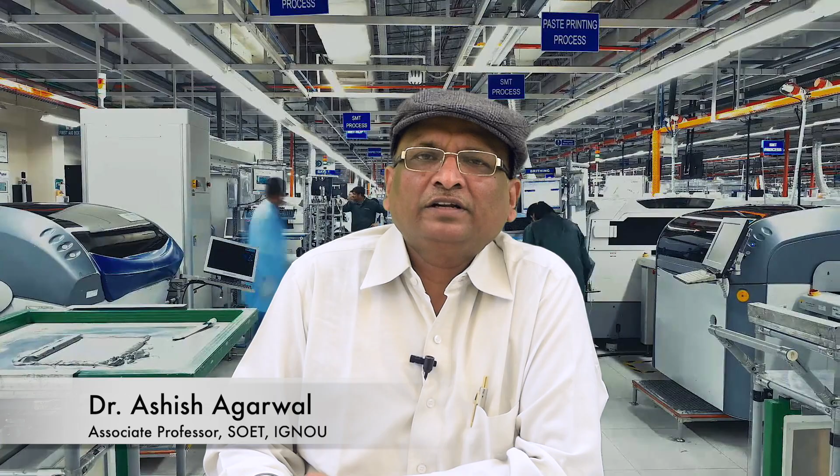When we discuss capacity planning, it is very important that we should know the sequence of activities. First, through forecasting, we have customer demand. Then, through aggregate planning, we have production planning. And then finally, with MRP and capacity planning, we decide what capacity is required at our end. The management must plan the capacity of its process after deciding what products or services should be offered and how they should be made.

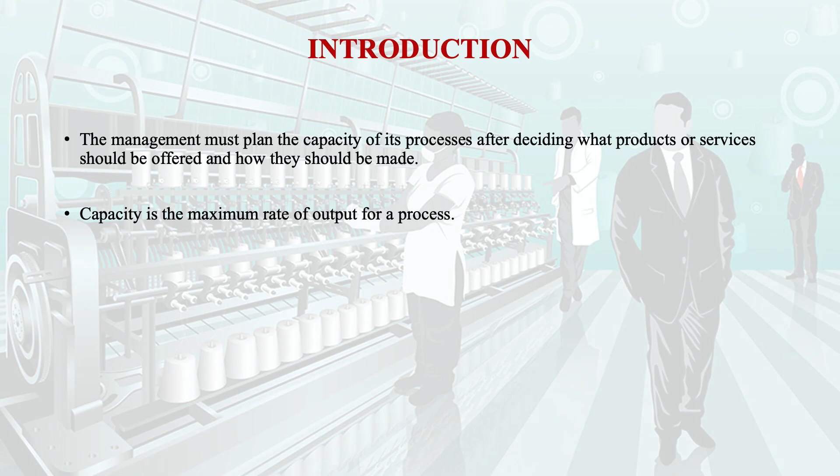Capacity means the maximum rate of output for a process. Under capacity planning, the operation manager should have the decision-making capacity to cope up with the present and future demand. Otherwise, the organization will miss the chance of growth and profit.

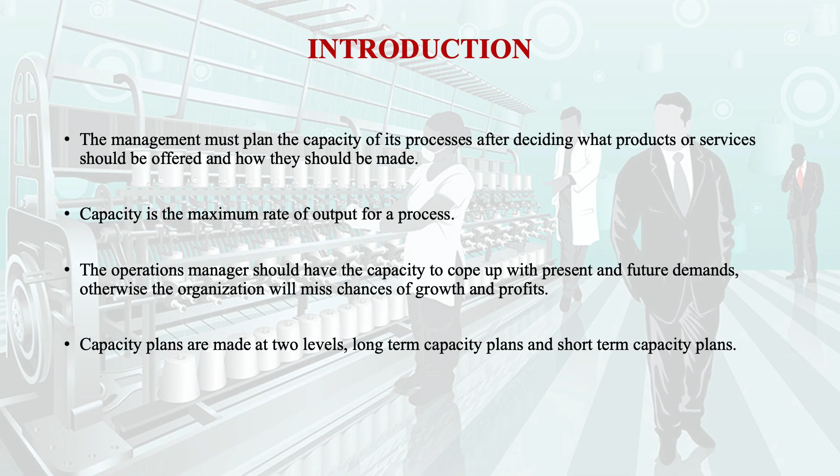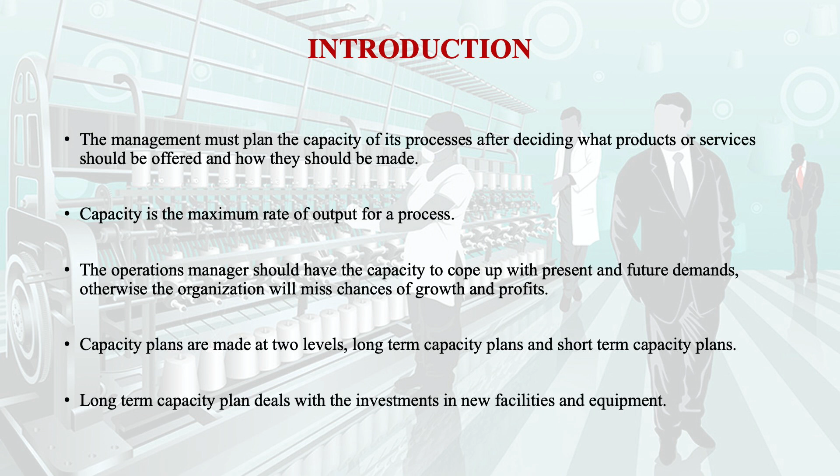Under capacity planning, there are basically two levels: first is the long-term capacity plan, and second is the short-term capacity plan. Under the long-term capacity plan, we deal with investment in new facilities, new equipment, and these plans extend at least up to 2 years in the future.

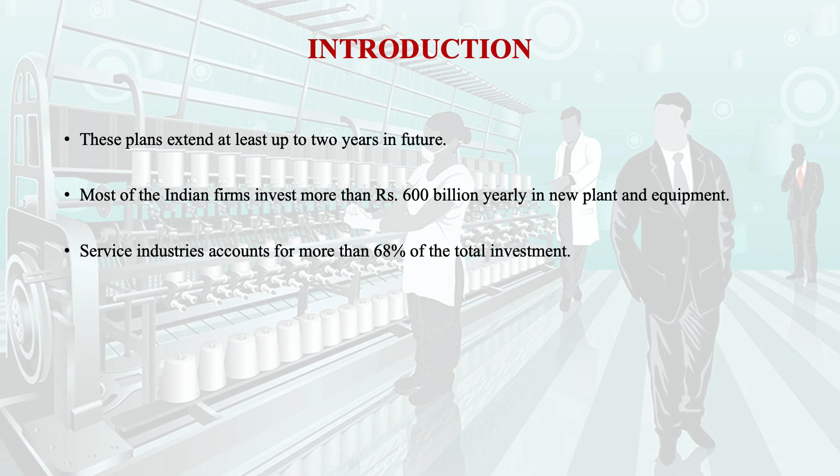Most Indian firms invest more than 600 billion yearly in new plant or equipment. Similarly, the service industry accounts for more than 68% of total investment. Such large investments require very good management participation and approval, because they cannot be reversed.

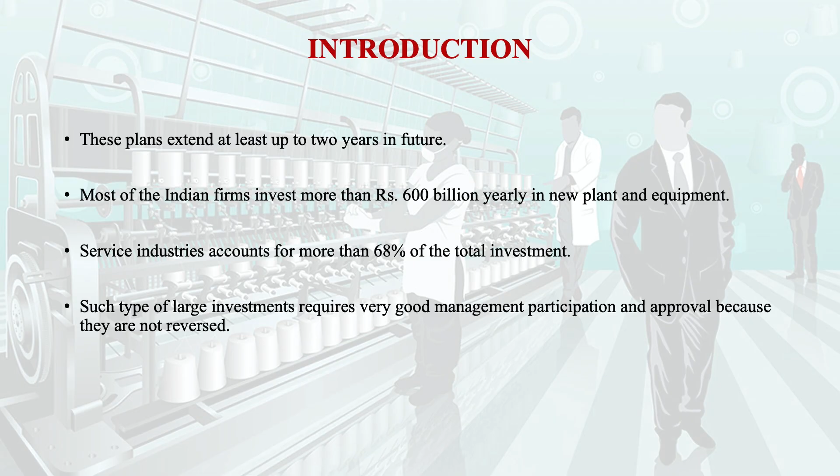Short-term capacity plans focus on workforce size, overtime budget, inventories, and other types of decisions that we will explore in later chapters or later video sessions.

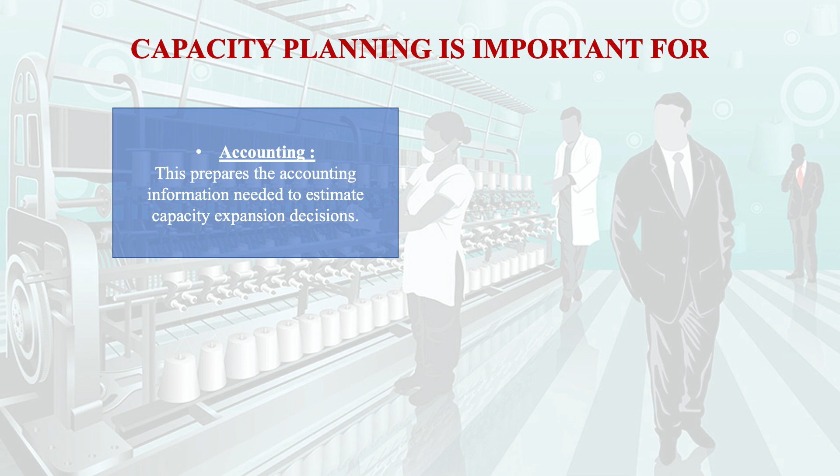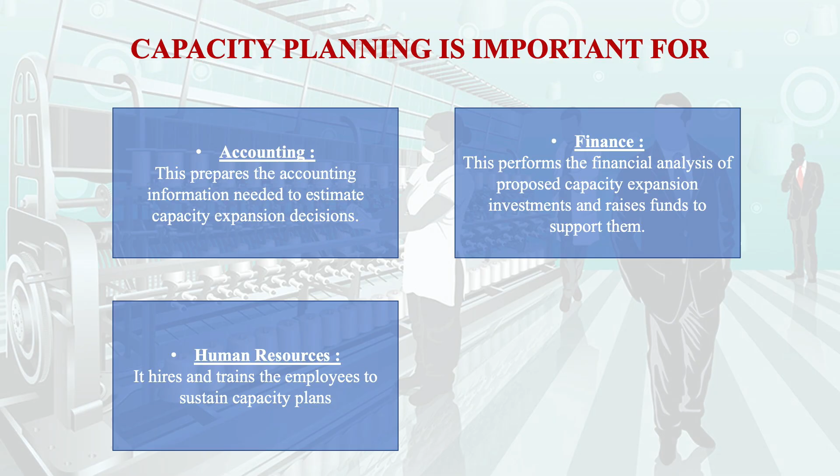Why is capacity planning important? Capacity planning is important for accounting, because this prepares the accounting information needed to estimate the capacity expansion decision. In case of finance, again, this performs a financial analysis of proposals of capacity expansion investment and raises the funds to support them. Human resources hires and trains employees to sustain the capacity plans.

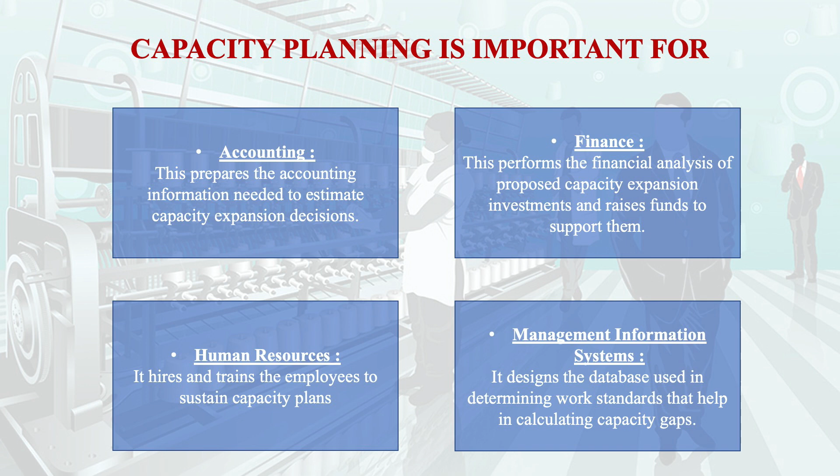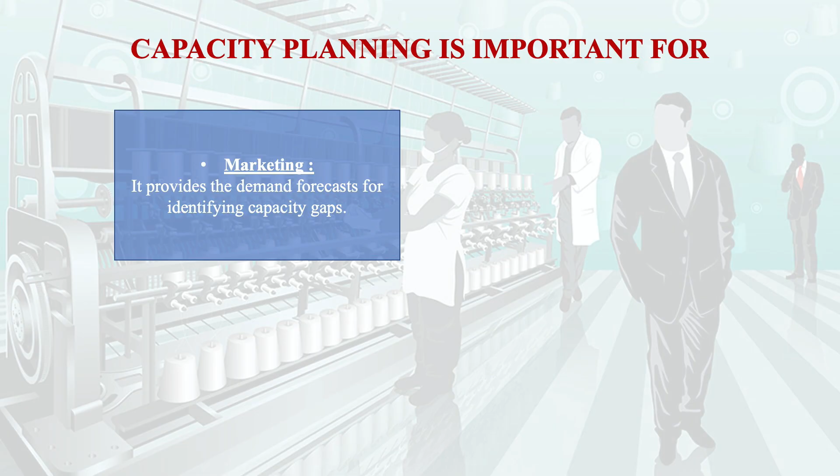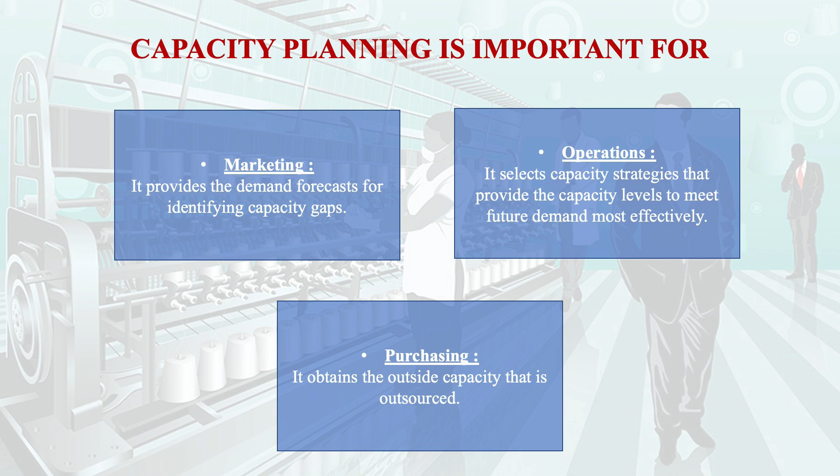Management information systems design the database used in determining work standards, which helps in calculating capacity gaps if they exist in the existing plan. Then the most important is marketing - it provides the demand forecast for identifying capacity gaps. Then comes operations, which selects the capacity strategies that provide capacity levels to meet future demand most effectively. And then purchasing, which obtains outside capacity that is to be outsourced.

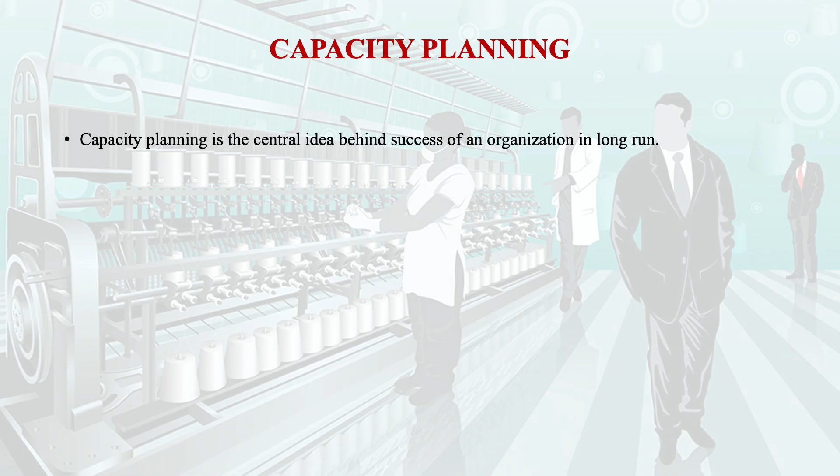Capacity planning is basically a central idea behind the success of any organization in the long run. While choosing the capacity strategy, the manager has to consider certain things, such as how much cushion is needed to handle variable or uncertain demand.

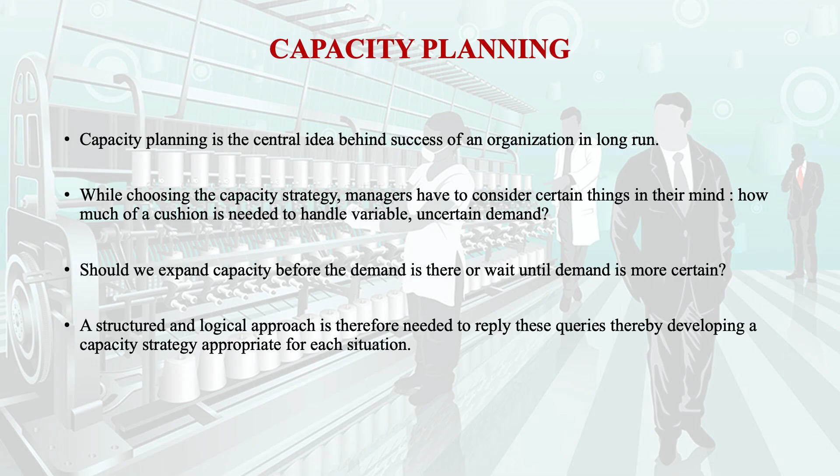Under the capacity plan, we also ask the question: should we expand capacity before the demand, or do we have to wait until the demand is more certain? A structured and logical approach is therefore needed to answer all these queries, thereby developing a capacity strategy appropriate for each situation.

So in today's session, we are going to learn the measures of capacity - how you will measure capacity. We will also learn the theory of constraints, though it will be covered in a separate session as well. Then we will discuss economies and diseconomies of scale in case of capacity planning.

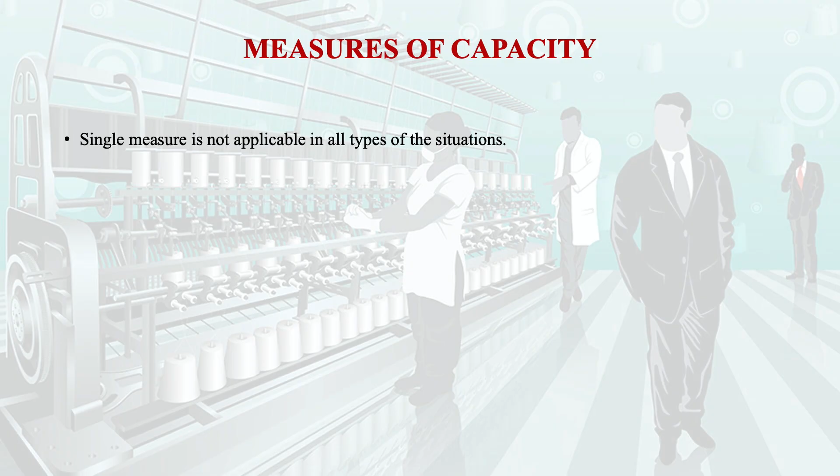The first important area under capacity planning is the measure of capacity. A single measure is not applicable in all types of situations. A retailer measures capacity as annual sales in rupees generated per square meter. Similarly, an airplane or airport authority measures capacity as available seat kilometers per month.

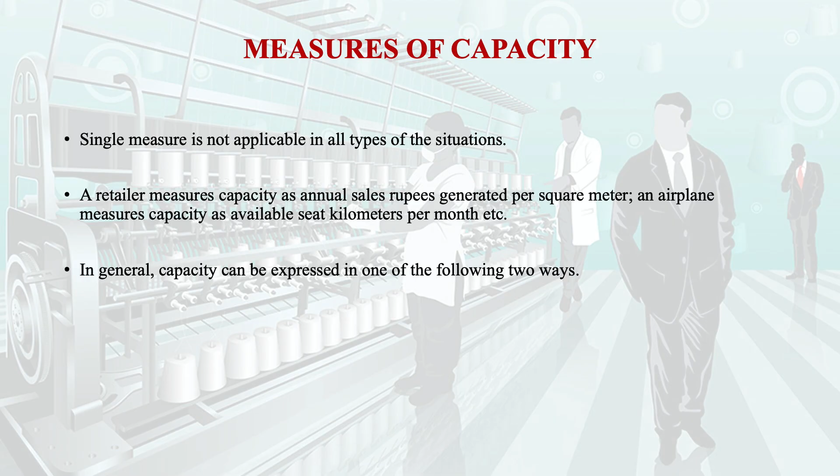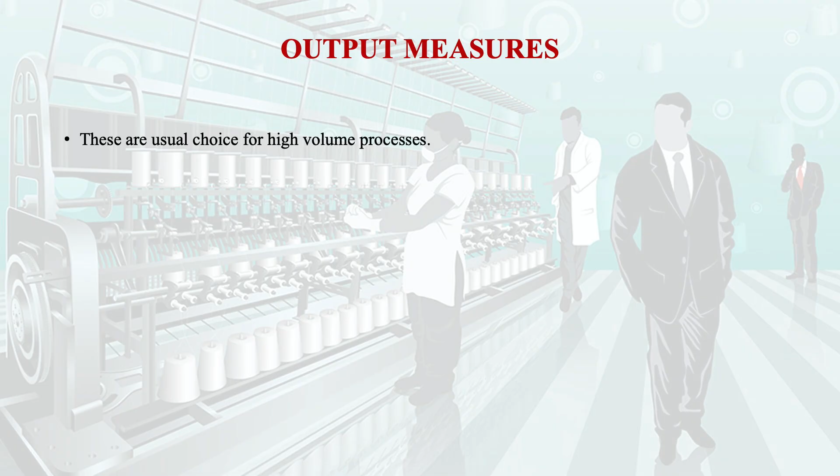In general, capacity is expressed in one of two ways. The first important one is the output measure. These are the usual choice for high volume processes. If a plant produces only a single item, for example a single type of vehicle, measuring capacity is very easy.

However, many times this may not be the case, and the plant may be producing different types of products. For example, if you take any car manufacturer, they are not producing only one segment. There may be the economical car segment, medium class segment, higher class segment, and the luxury car. Besides that, there may be heavy duty vehicles. So all these are different.

Then what will be the output measure? We will decide that if it is an 800cc car, we will say it is 0.8 unit of passenger car. If it is a Wagon R type, we will say 1 unit. If it is Ritz type or Swift, we will say 1.2. And similarly, for a higher class or even luxury class, we can say 2 units.

So the car manufacturer will say that they are going to manufacture so many units of passenger car. They will not say economical car so much, medium car so much, higher class car so much. No, they will simply say this much unit of passenger car.

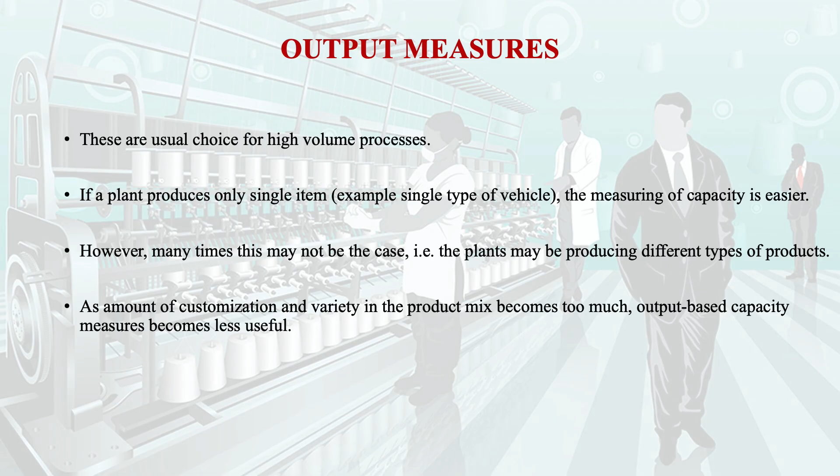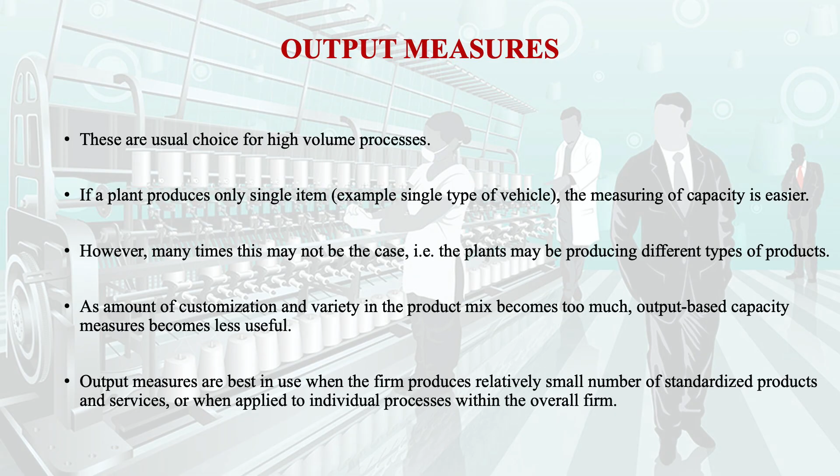Under the output measure, as the amount of customization and variety in the product mix becomes too much, the output-based capacity measure becomes less useful, as I have quoted one example of the passenger car. Output measures are best in use when the firm produces a relatively small number of standardized products and services, or when applied to individual processes within the overall firm.

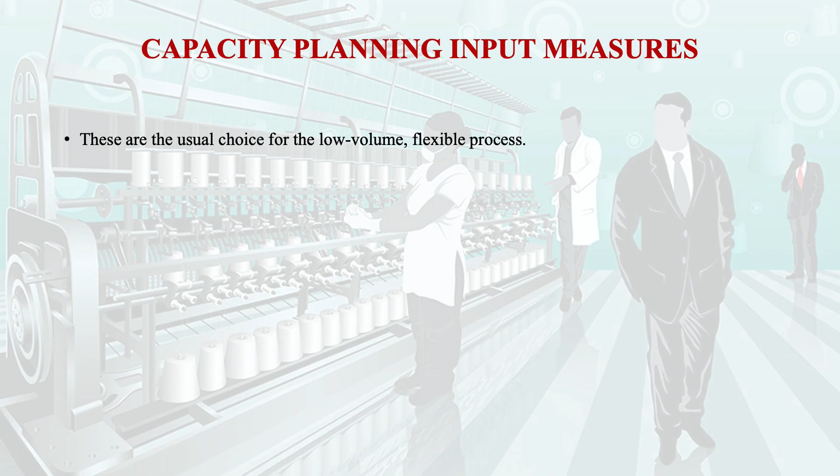Another type of measure is input measure. These are the usual choice for the low volume and the flexible process. Here I will just give you one example. In a photocopy shop, the capacity can be measured as machine hours or the number of machines. Just like product mix can complicate the output capacity measure, the same can complicate the input measure. That means if we have multiple products, even in case of input, the input measure will also become more complicated.

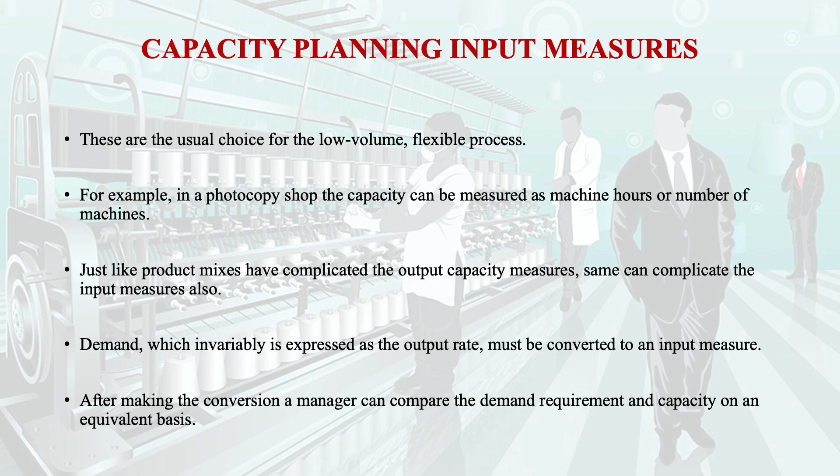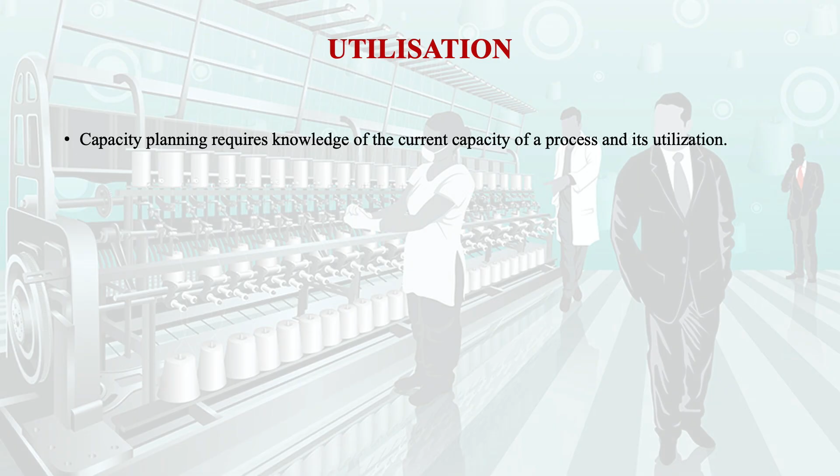Demand, which is invariably expressed as the output rate, must be converted into an input measure. After making the conversion, a manager can compare the demand requirement and capacity on an equivalent basis. Under capacity planning, an important term which comes is utilization. Capacity planning requires knowledge of the current capacity of a process and its utilization. Therefore, utilization is the degree to which the equipment, space or labor is currently being used.

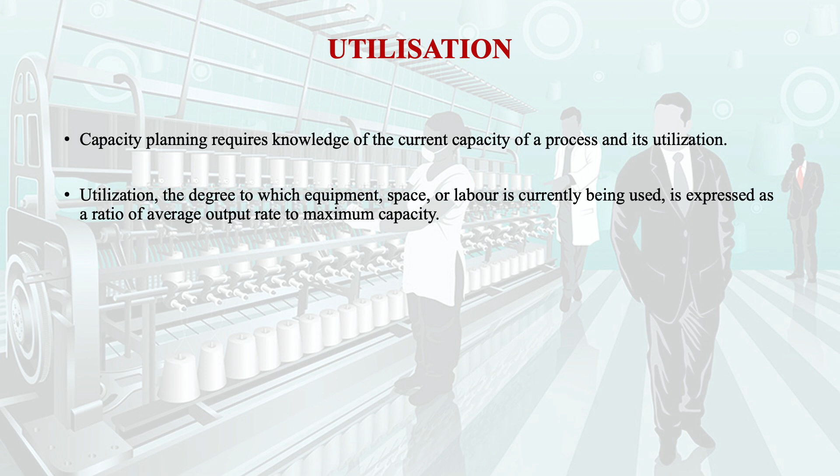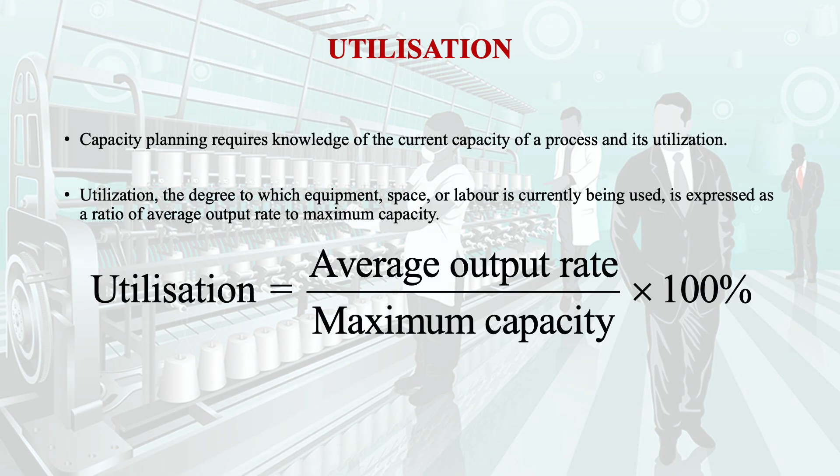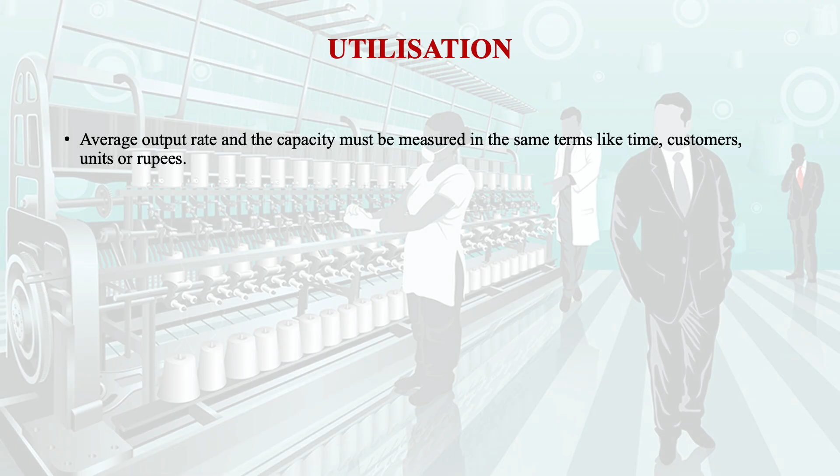If you want to express it mathematically, then utilization is the ratio of average output rate divided by the maximum capacity rate, and the ratio is multiplied by 100, so we get the percent utilization. The average output rate and the capacity must be measured in the same terms, like in terms of time, customers, units, or rupees. Utilization rate also indicates the need for adding extra capacity or eliminating unneeded capacity.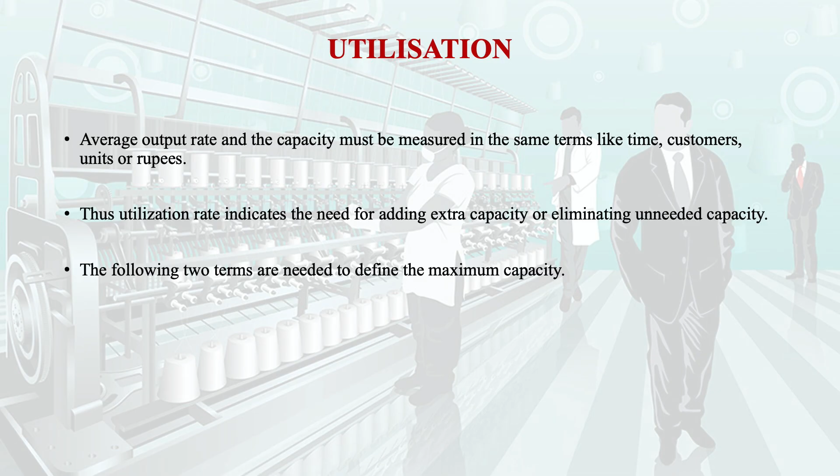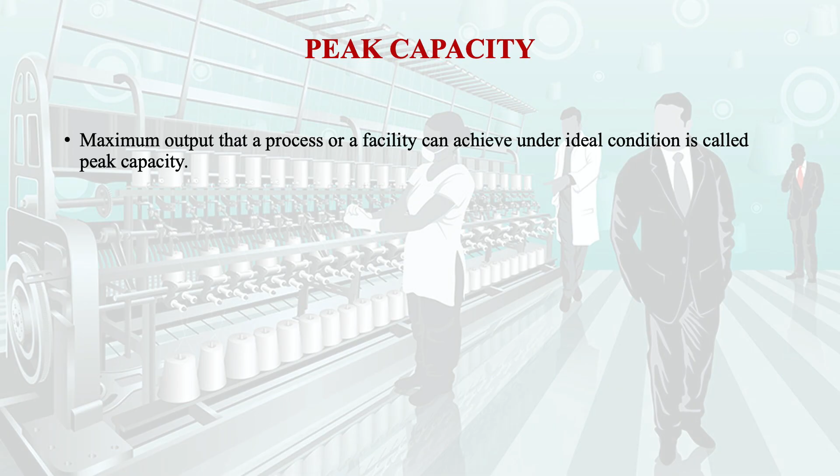We have two terms that are required to define the maximum capacity. The first one is called peak capacity. Peak capacity means the maximum output that a process or a facility can achieve under ideal conditions. That means if all the things go well, then how much maximum can be produced. That means our machine is running well, our worker is good and efficient, all the materials are quality material, then what output we will achieve, that is called the peak capacity.

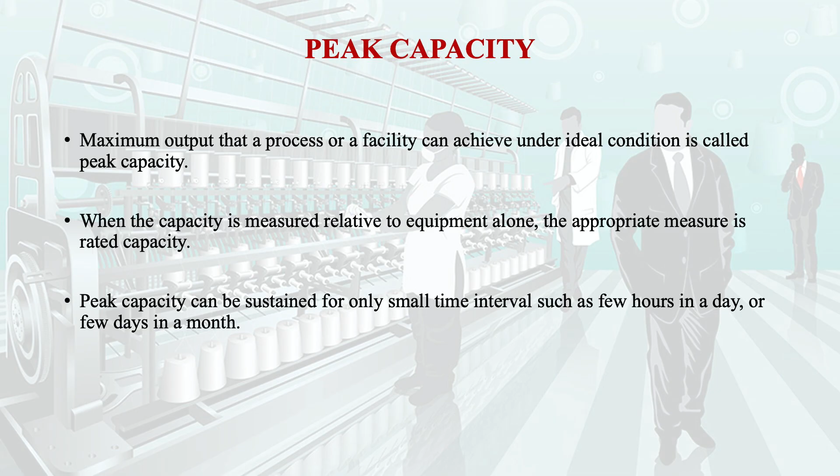When the capacity is measured relative to the equipment alone, then the appropriate measure is called rated capacity, because it is relative to equipment only. Peak capacity can be sustained for only a small time interval, a few hours in a day or a few days in a month. For example, if production starts in the morning, as an industrial engineer you must appreciate that the worker will take time to gain the pace. After a certain period, he will gain the pace, and at that time he will reach the peak or maximum capacity. After that, due to fatigue and monotony, the capacity will come down.

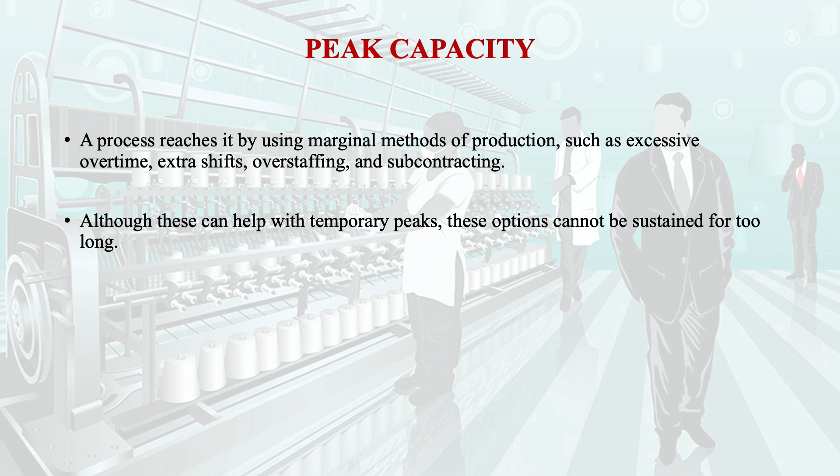Under peak capacity, a process reaches it by using marginal methods of production, such as excessive overtime, extra shifts, overstaffing, and subcontracting. So these are the four types of alternatives by which we can achieve the peak capacity as short-term measures. Although these can help with the temporary peak, these options cannot be sustained for long. For example, if our demand is not going to be fulfilled, we will go for overtime, extra shifts, overstaffing. We can even go for the make or buy decision, that is subcontracting, so that we can meet the timeline.

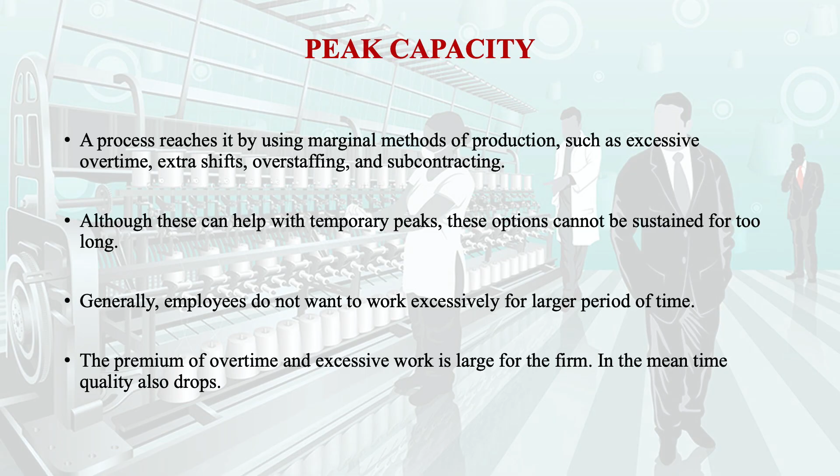Generally, employees do not want to work excessively for a longer period of time. The premium for overtime and excessive work is large for the firm. In the meantime, quality also drops. If you force the workers into overtime, then definitely quality will suffer. The second important type of capacity is effective capacity. The maximum output that a process or a firm can sustain under normal operating conditions is called effective capacity.

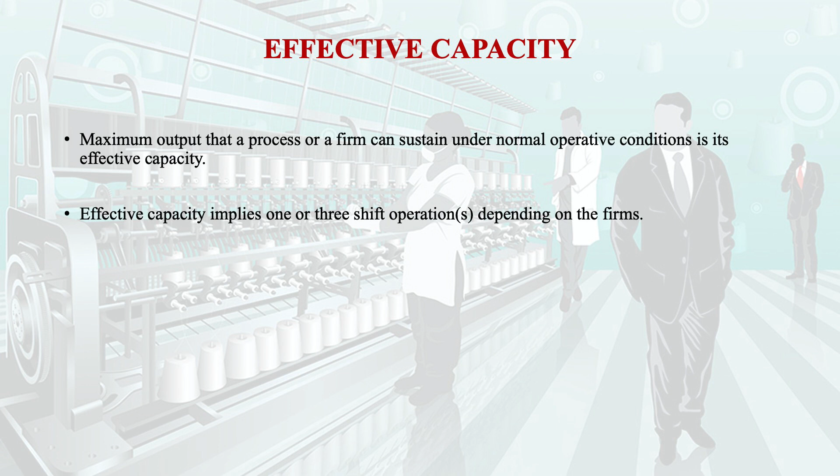When we are going for ideal capacity or ideal conditions, then we get the peak capacity. Under normal operating conditions, we get the effective capacity. That means effective capacity implies one or three shift operation depending on the firm. In a normal course, any factory normally has 1 shift, 2 shifts or 3 shifts. So these are the normal conditions.

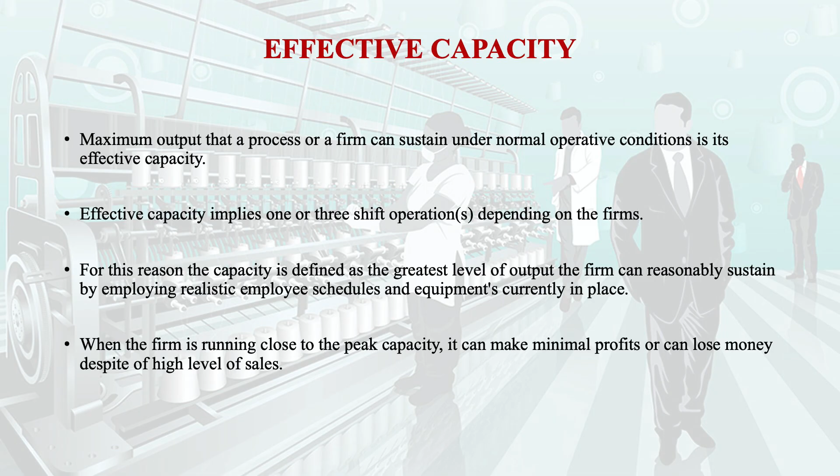For this reason, the capacity is defined as the greatest level of output the firm can reasonably sustain by employing realistic employees, schedules and equipment currently in place. When the firm is running close to the peak capacity, it can make minimal profit or can lose money despite a high level of sales. So one should understand that it is easy to achieve the peak capacity, but there are consequences when we achieve the peak capacity by overstaffing or by overtime.

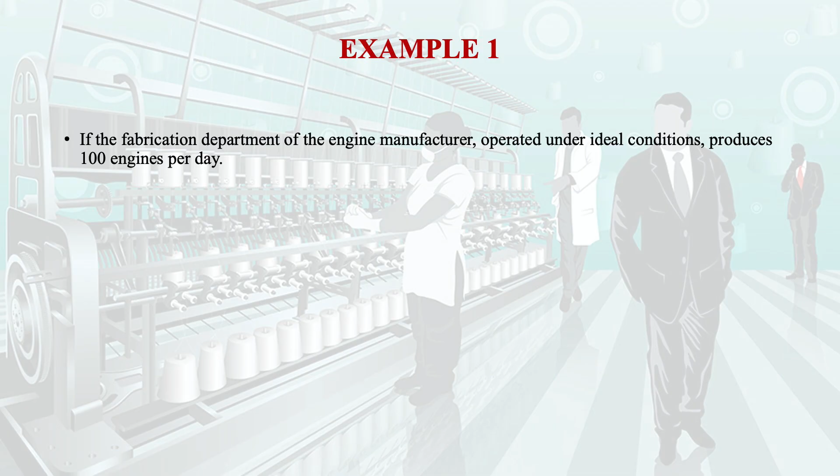For example, if the fabrication department of an engine manufacturer operated under ideal conditions, it produces 100 engines per day. Management believes that the maximum output rate of 45 engines per day can be sustained economically over a long period of time. Currently the department is producing an average of 50 engines per day.

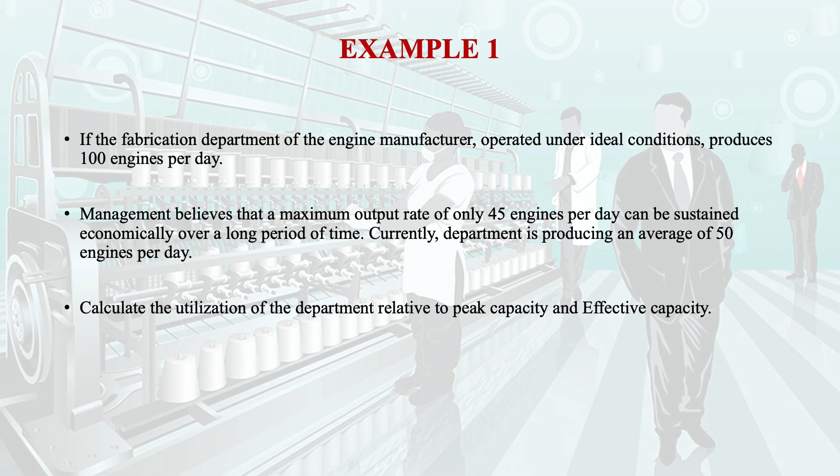So now we have to calculate the utilization of the department relative to the peak capacity and the effective capacity. Remember, 100 engines per day is the peak capacity and the effective capacity is 45. We will see with the help of our calculation what the utilization of the department is. There are 2 different utilization measures. The first one is utilization peak: 50 divided by 100, so we are using only 50%. In the other case, average output is 50 and effective capacity is 45, so it is 111% utilization of the capacity.

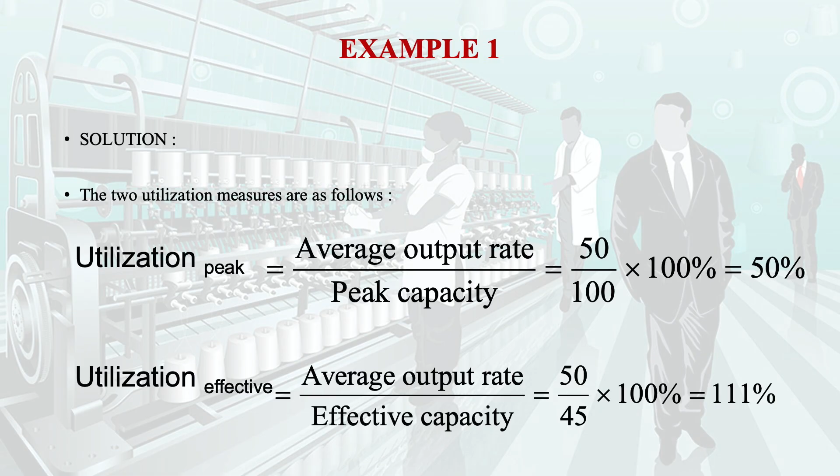We were discussing how to increase the maximum capacity, because that is the interest of any top management. Every time management wants to go for the peak capacity. Suppose we are working at effective capacity. How will you go from effective capacity to the maximum capacity? For performing most operations, multiple processes are involved and their effective capacities are not identical. The system's output is limited by the bottleneck operation. The bottleneck operation is the operation having the lowest effective capacity in the process.

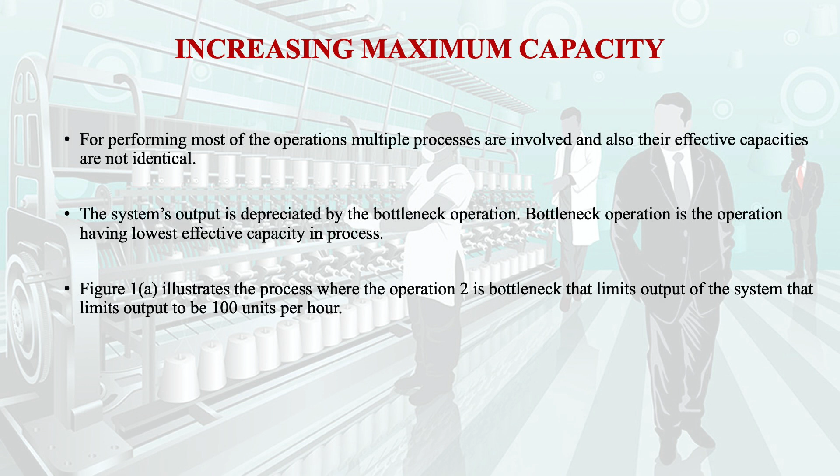I will show you with the help of a figure. In the process, operation 2 is a bottleneck and that limits the output of the system to 100 units per hour. In the upper figure, you will find there is a bottleneck in between, while in the lower one, the whole process is very smooth. The bottleneck process always hinders achieving the maximum capacity. So we have to control that bottleneck portion of the process.

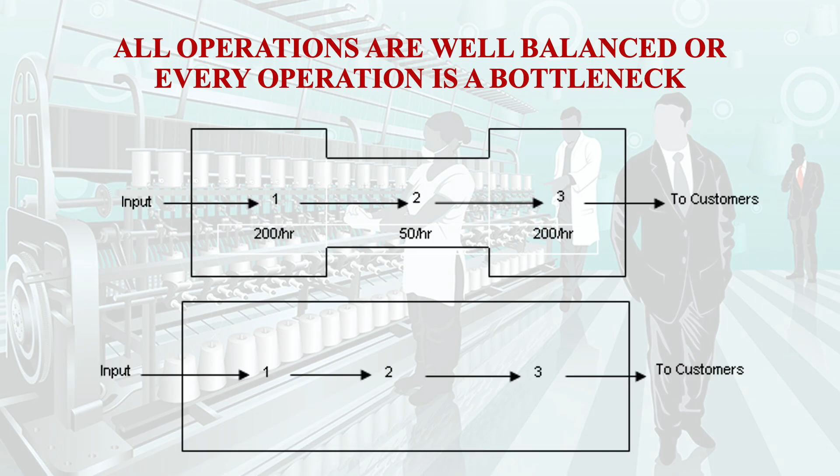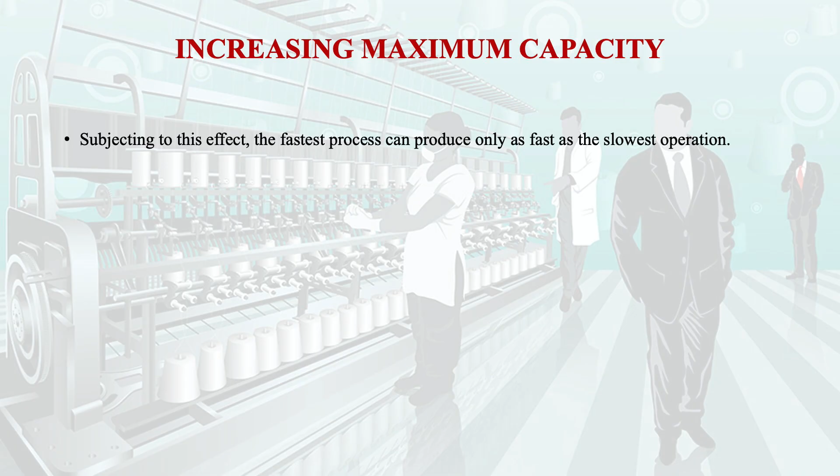Subject to this effect, the fastest process can produce only as fast as the slowest operation. If the fastest operation is producing 10 items per hour and the slowest process is producing 2 items per hour, then the speed will only be 2 items, because other items have to wait, since the slowest operation cannot speed up its process, and that is why it is called the bottleneck process. We have shown through figure 1b where all the operations are well balanced, or in other words every operation is a bottleneck.

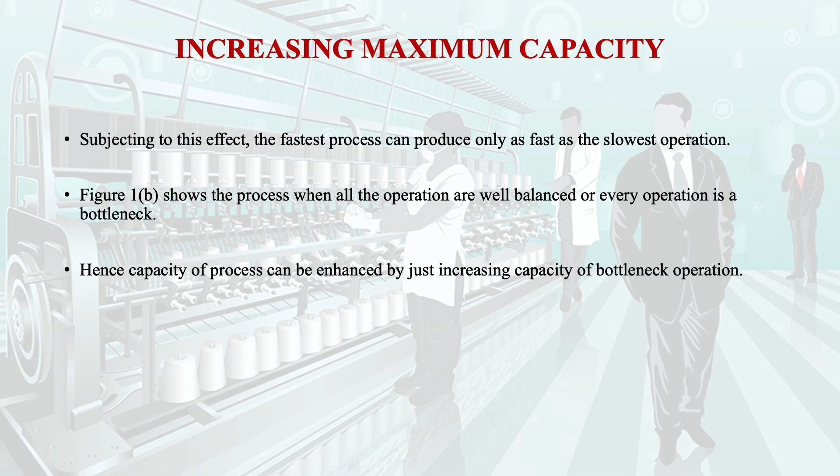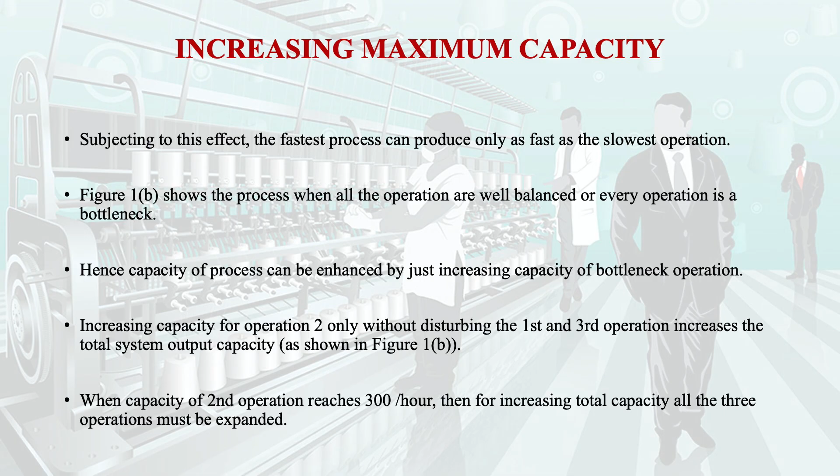Hence the capacity of the process can be enhanced by increasing the capacity of the bottleneck operation. If we increase the capacity of operation 2, which is the bottleneck, without disturbing the capacity at operations 1 and 3, then we can increase the total output capacity. When the capacity of the second operation reaches 300 per hour, then to increase the total capacity, all 3 operations must be expanded. I want to clear one thing: when we increase the capacity of the bottleneck, it should be synchronized with other operations also.

Now we will see what the theory of constraints is. There will be a separate video session on the theory of constraints, but since it is a very important topic in capacity planning, we are taking a brief look at it.

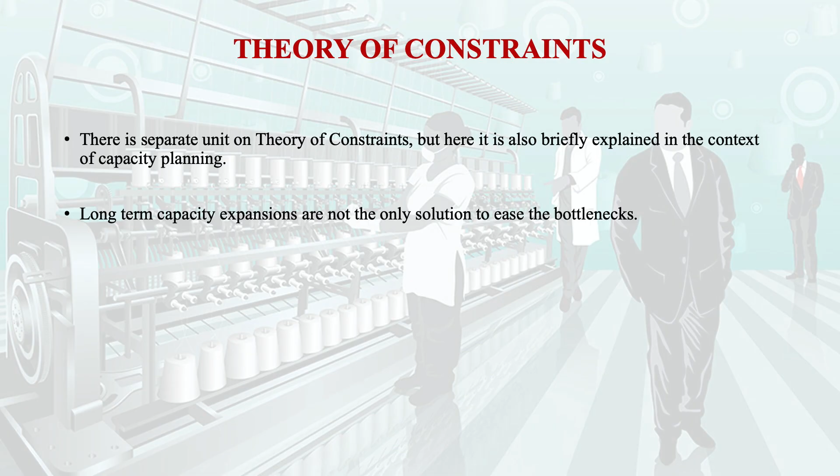Under the theory of constraints, long-term capacity expansion is not the only solution to ease the bottleneck. Short-term options during the peak periods are hiring temporary persons, just like temporary employment, or we could hire part-time employees, or we could outsource. These are some of the alternatives which are short-term actions.

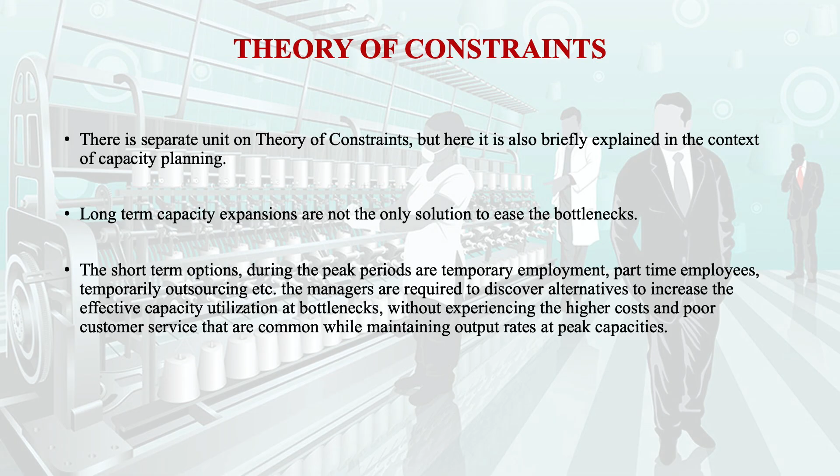The managers are required to discover other alternatives to increase the effective capacity and the utilization at the bottlenecks without experiencing the higher cost or the poor service level that are common while maintaining the output rate at the peak capacity. And here you will recall that we have also pointed out that whenever we want to increase the effective capacity, there are chances of lowering the quality of the product or the item.

Here, when we are going for increasing the maximum capacity, this can be resolved if we carefully monitor the short-term schedule. We should keep the bottleneck resources as busy as possible. That means if the bottleneck is set for 5, then we should not lower down the capacity. We should always keep them busy by giving them 5, so we are getting the 5 units per hour.

The common practice adopted by the managers in this situation is to minimize the time lost at bottlenecks because the jobs or the customers are delayed at the upstream operation in the process, or because the necessary material is temporarily not available; then there is a problem in the bottleneck operation. So one should avoid this and try to exploit the maximum capacity of the bottleneck operation.

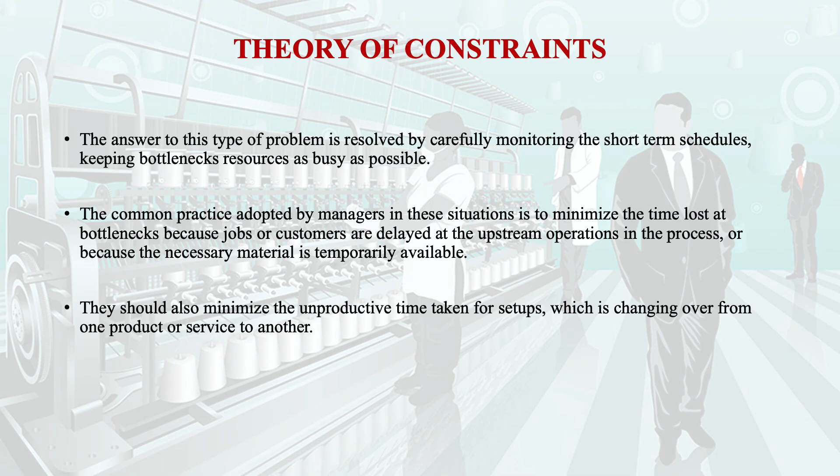Another important point which I want to mention: they should also minimize the unproductive time taken for the setup, which is changing over from one product to another product or one service to another service, because setup time is another time-consuming activity. So one should prepare oneself or the machine for the changeover.

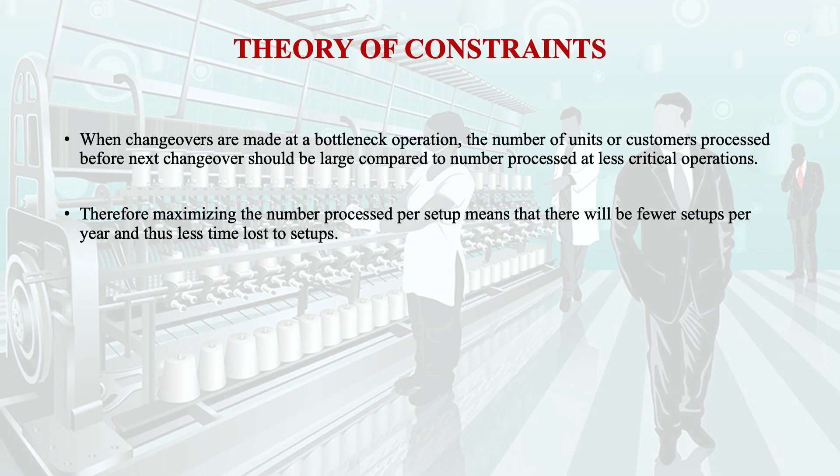When the changeovers are made at a bottleneck operation, the number of units or customers processed before the next changeover should be large compared to the number processed at less critical operations. Therefore, maximizing the number processed per setup means there will be fewer setups per year, and thus less time will be lost in setup.

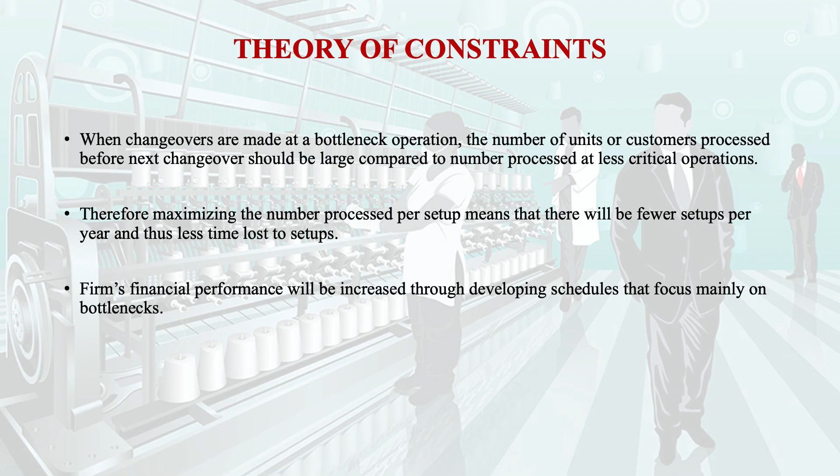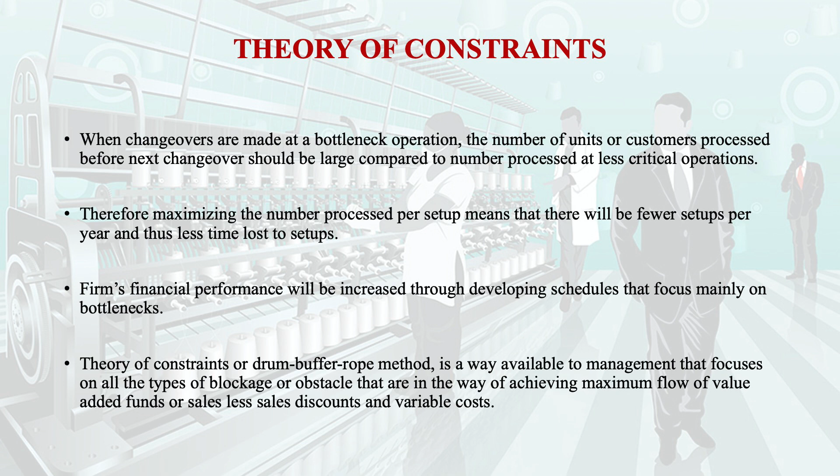If we talk about the financial performance, it will be increased if we develop the schedule by mainly focusing on the bottleneck. Theory of constraints, also called the drum buffer rope method, is a way available to management that focuses on all types of blockages or obstacles that are in the way of achieving maximum flow of value added funds, or the sales less sales discounts and the variable cost. That means whatever we are going to achieve from the bottleneck operation should be given top priority.

If we talk about the blockages or impediments, they must be overloaded. If we say overloaded, in other words, they should not be underloaded. If the capacity is 100, it should run at 100 capacity. Whether it is an order entry, a new product development, or a change in manufacturing operation, we should always make sure that the blockage or impediment is not underloaded.

The central idea of this theory is to focus on the blockage or the bottleneck to increase the throughput, that is, the flow of total value added funds. If we are increasing the total flow, we are increasing the throughput. Therefore, the performance of the overall system lies in the scheduling of the bottleneck. It is very important to note that if we manage the bottlenecks by properly scheduling them, we can maximize the throughput of our products or services in accordance with the completion date which we have already promised to our client or customer.

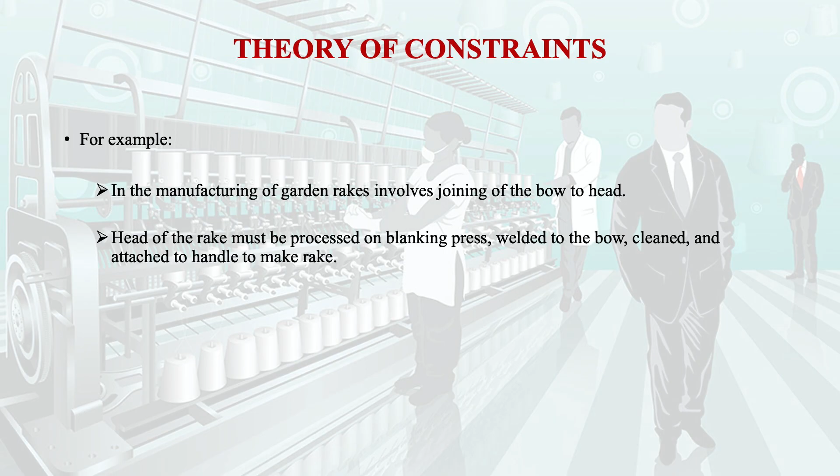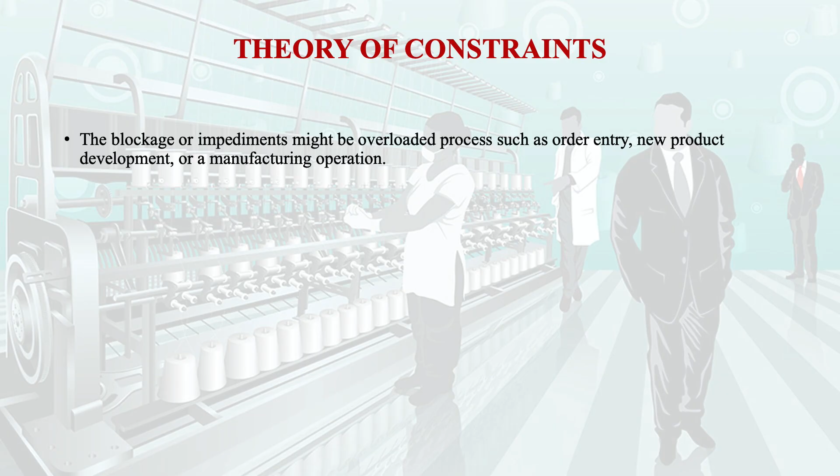For example, the manufacturing of garden rakes involves joining the bow to the head. The head of the rake must be processed on a blanking press, welded to the bow, cleaned and attached to the handle to make the rake. It is packaged and finally shipped according to the delivery schedule. So here we have to find what the bottleneck is and schedule it properly. The blockage or impediment must be overloaded, as we have already said, and the central idea behind it is to increase the total value added funds and the throughput.

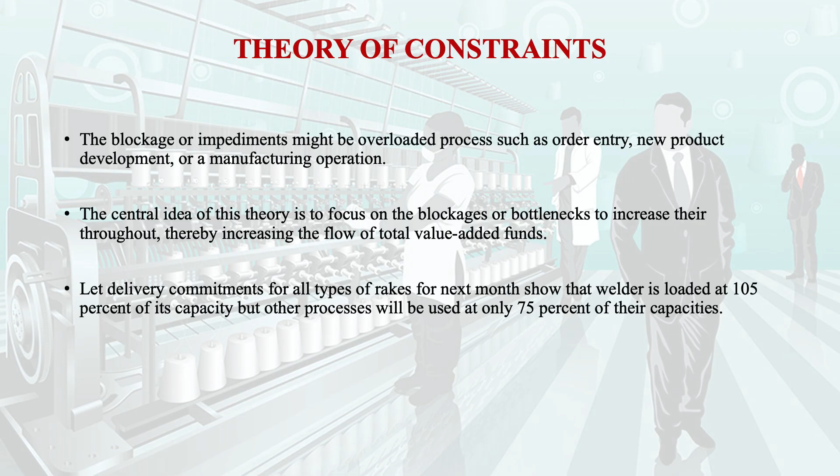If the delivery commitments for all types of rakes for the next month show that the welder is loaded at 105% of its capacity, but the other processes will be used at only 75% of capacity, then according to the theory of constraints, the welder is a bottleneck resource, whereas blanking, cleaning, handle attaching, packaging and shipping are not bottleneck resources. Therefore, the welding should be properly scheduled. First, there should not be any idle time at the welder, and any idle time is a lost opportunity to generate total value added funds or increase throughput.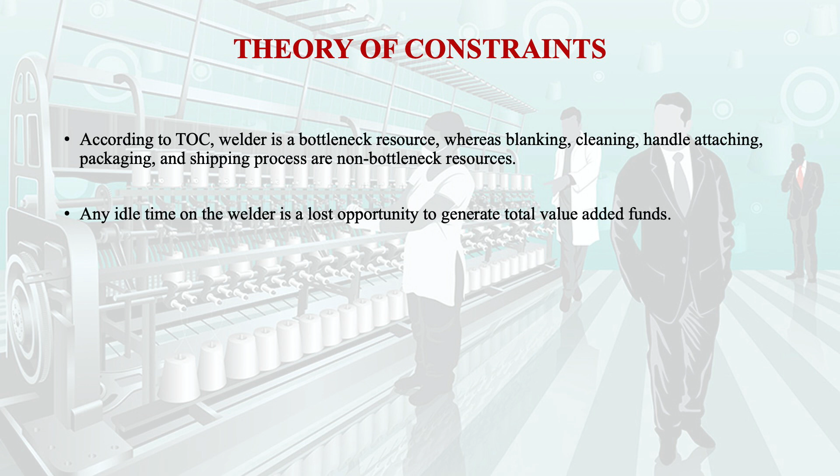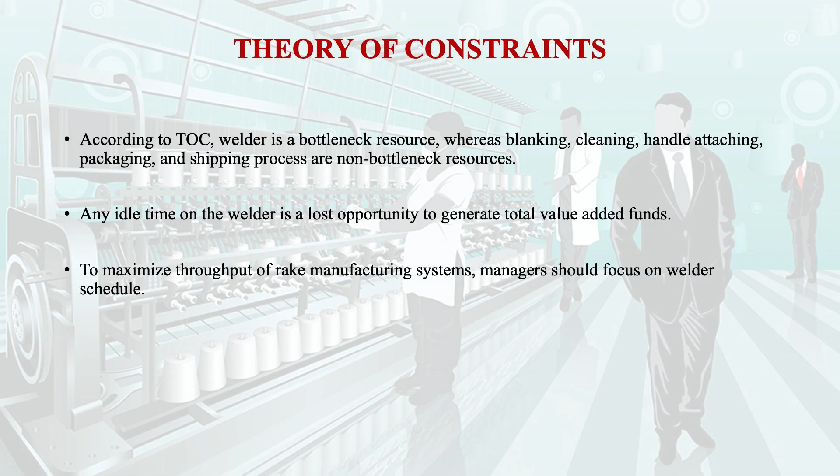In order to maximize the throughput of the rake manufacturing system, the manager should focus on the welder schedule, or in other words, the bottleneck schedule. This is how the theory of constraints finds application.

We have put this into several steps. The first step is to identify the system bottleneck. If I take the example of rake manufacturing, the bottleneck is the welder, because it restricts the firm's ability to meet the shipping schedule and has the total value added funds.

The second step is to exploit the bottleneck, meaning there is a need to develop a schedule that maximizes the throughput of the bottleneck. In the rake example, there is a need to maximize utilization at the welding end while meeting the shipping commitment to the possible extent.

The third important step is to subordinate all other decisions to step 2. Recalling step 2, which is about scheduling the bottleneck, whatever decisions are subordinate to the welding process should be properly handled.

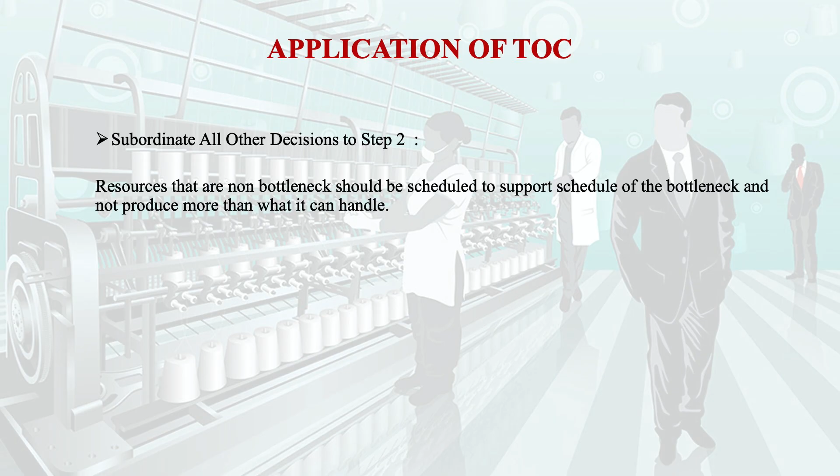Resources that are not the bottleneck should be scheduled to support the schedule of the bottleneck, and they should not produce more than it can easily handle. Suppose the welding machine can handle only 5, and we send 7 items for welding—it will weld 5, and the other 2 will act as work in process. So there will always be time lost with those 2 items.

Another important step is to elevate the bottleneck. After scheduling improvements in steps 1 to 3 have been exhausted and the bottleneck is still a constraint to throughput, management should consider increasing the capacity of the bottleneck.

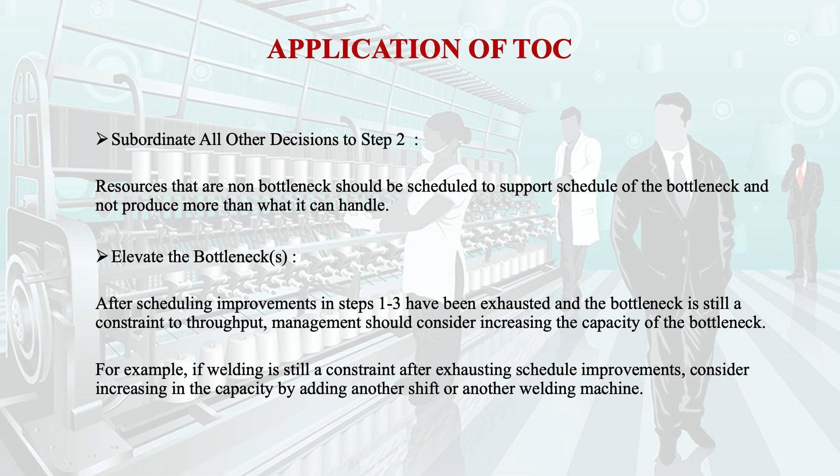This is another alternative. If we try all courses of action and are not getting success, another important option is increasing the capacity of the bottleneck. For example, if welding is still a constraint after exhausting the schedule improvement, consider increasing capacity by adding another shift or by adding another welding machine.

There are two alternatives. Either we can have another shift of 8 hours, where the same machine and same operator, or a different operator, will work for the other shift. Another alternative is to buy another welding machine with another operator, so that we may have extra capacity.

We are discussing different alternatives to tackle the bottleneck operation. The first alternative is scheduling. The second option is increasing the capacity.

If we are not able to see results from these actions, the most important thing is that inertia should not come in the way of handling the bottleneck. So the actions taken in steps 3 and 4 must be considered, as they will improve the welder throughput and may alter the loads on other processes. Another option is that even the system constraint may have shifted to another place, so we should watch for new trouble from the bottleneck operation.

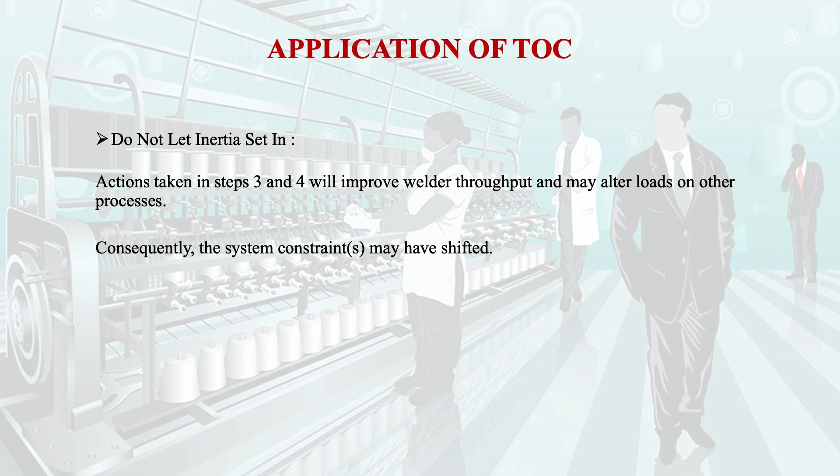Capacity planning is a very important topic which we have discussed in today's session. By making a plan for capacity, we decide how much capacity we have and how much capacity we need to meet the customer demand.

For example, if we are getting more customer demand, more capacity is required. And if we are getting less demand, then it is quite possible that our capacity will remain unutilized.

We have discussed the term utilization in terms of average capacity and in terms of peak capacity or effective capacity. We have learned about peak capacity and effective capacity.

We have also gone through certain important aspects of theory of constraints in this session, and the most important point is the consideration of the bottleneck. In every operation or process, we always get a bottleneck operation.